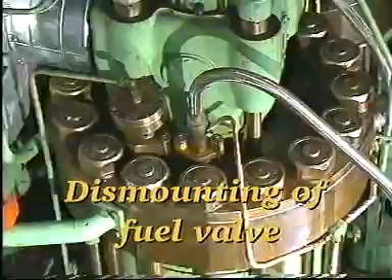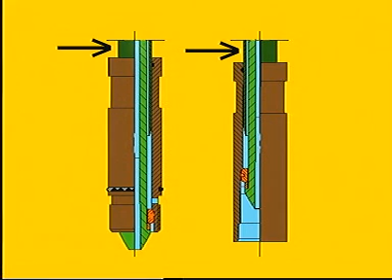Before any dismantling, drain the fuel oil from the fuel oil high pressure pipes. Confirm that the oil flow has stopped before continuing. The fuel oil high pressure pipe may be provided with a protective outer pipe or with flexible steel wire braided hoses. See Instruction Book Volume 2, Chapters 901 and 909.

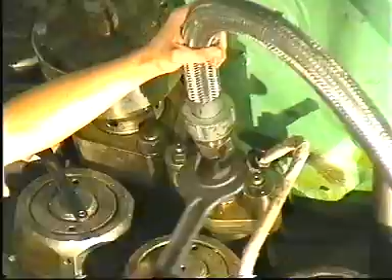Using a hook spanner, loosen the union nut. Using a spanner, loosen the coupling pieces fitted on each end of the high pressure pipe. Remove the high pressure pipe. Take care not to damage the high pressure pipe seatings.

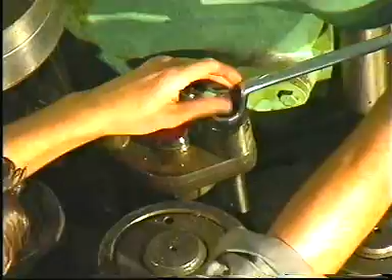Disconnect the return oil pipe from the fuel valve. Mount protective plastic plugs in or on all high pressure seatings. Unscrew the retaining nuts and remove the spring housings. Remove the fuel valve from the cylinder cover using the lifting tool if the valve sticks.

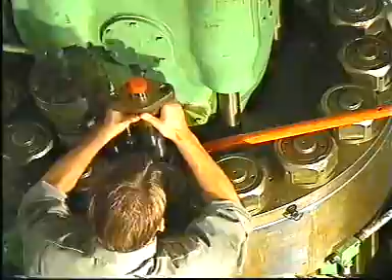Thoroughly clean the fuel valve bore in the cylinder cover. Clean off any carbon deposits in the fuel valve bore with a carbon cutter. If marks are found on the seating in the bore, recondition the seating with a seating face cutter. Finally, grind the seating with a grinding mandrel and a grinding compound, for example carborundum number 200.

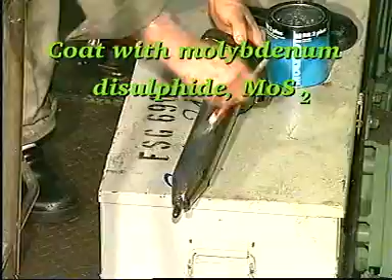After milling and grinding, thoroughly clean the bore and seating and check again that there are no signs of damage on the seating. After reconditioning the seating in the bore and thoroughly cleaning both bore and seating, fit new O-rings on a new or overhauled fuel valve which has just been pressure tested and lubricate with molybdenum disulfide. Carefully mount the valve in the cylinder cover.

To ensure that over-tightening has not taken place, check that the locking and indicating pins have not been bent or broken off. In the event of over-tightening, mount a new spring housing. We recommend that the calibration of new and especially old spring housings be checked before they are mounted on the engine or on the fuel valve test rig.

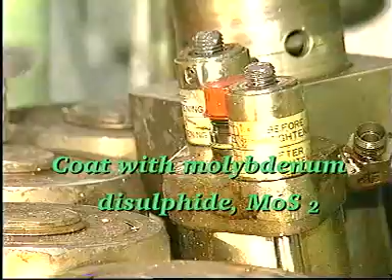Mount the spring housings and retaining nuts. Tighten the nuts until the top face of the pressure disc is flush with the top face of the spring housing. Reconnect the return oil pipe to the fuel valve.

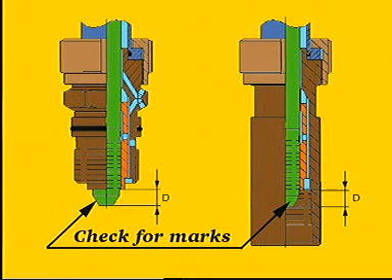Check that there are no marks on the seating surfaces of the fuel oil high pressure pipe. If necessary, recondition the seatings as described in procedure number 909. On fuel oil high pressure pipes which are provided with a steel armoured protective hose, also check distance D, that is between the thrust bushing and the pipe end. See procedure number 909.

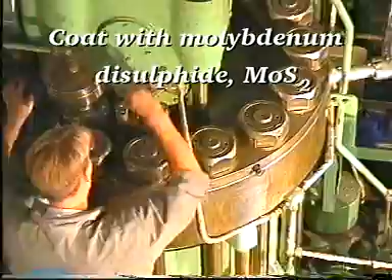Clean the threads and replace the O-rings. Coat the threads with molybdenum disulfide. Mount the fuel oil high pressure pipe.

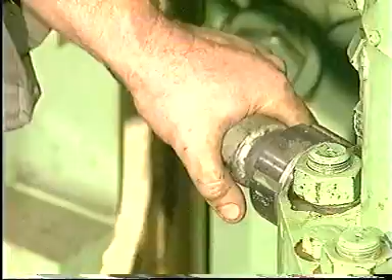Adjust the torque spanner to the value indicated in procedure number 901. Tighten the coupling pieces using the torque spanner. Using the hook spanner, tighten the union nut. Close the fuel oil drain valve. Turn on the fuel oil supply.

Slide-type fuel valves which have been in service on the engine must be disassembled and cleaned before pressure testing, as otherwise the results of the pressure testing will be inaccurate. Pay particular attention to the cleaning of the cut-off slide and the nozzle. When overhauling fuel valves, handle all parts with care and keep them clean.

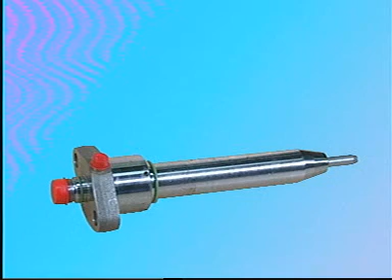Careful handling applies particularly to the spindle guide and cut-off slide, as any rough handling of these components may cause them to malfunction. Do not clean the fuel nozzle with a rotating steel brush, as this may damage the spray holes. If cleaning with diesel oil or the like is insufficient, use emery paper to clean the spray holes.

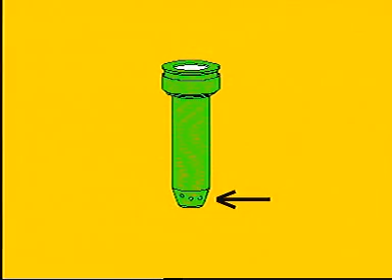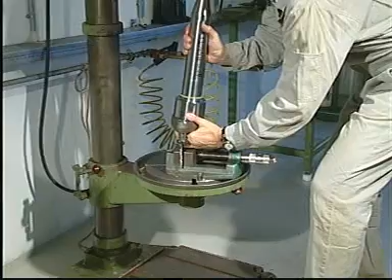Using the special tool, set up the fuel valve on the plane of a drilling machine. Before disassembling the fuel valve, measure distance A, as this measurement is used later during reassembling. Mount the special tool to protect the fuel valve nozzle. Press down the handle of the drilling machine to compress the spring of the thrust spindle. This will relieve the pressure on the threads of the union nut and thereby prevent seizure. Using a hook spanner, loosen the union nut.

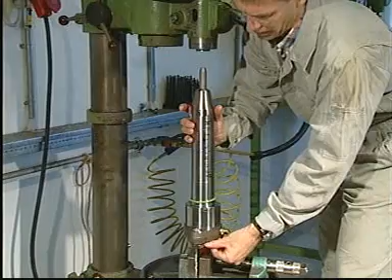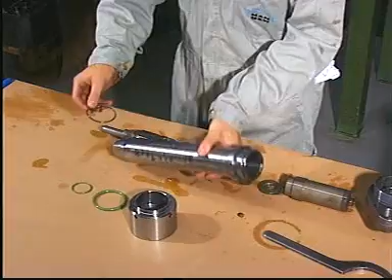Remove the sealing rings from the valve head and valve housing. Remove the non-return valve, thrust spindle and spindle guide. Remove and discard all sealing rings. Clean all parts in gas oil and wipe them dry with clean, non-fluffy rags.

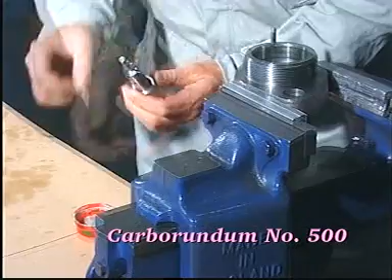Examine all seating surfaces of the valve head, thrust spindle and valve housing. If necessary, grind the seating surfaces with the grinding mandrels and carborundum number 500. Use the milling tool if more serious damage has occurred on the seating surface for the fuel oil high pressure pipe. Loosen the screw and press the spindle and stop ring downwards. Then retighten the screw.

The diameter of the seating surface must not exceed the value stated in procedure 909/6 in volume 2 of the instruction book.

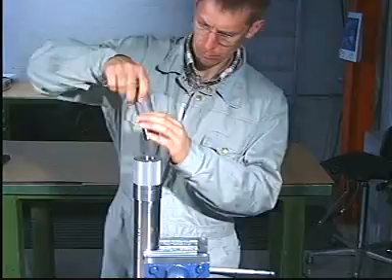After grinding and milling, clean the parts in gas oil and wipe them dry with clean, non-fluffy rags. The non-return valve and spindle guide should be sent to an MAN B&W diesel service centre or authorised repair shop for overhaul. If this is not possible, the parts may be overhauled as described in the next sequence in this film.

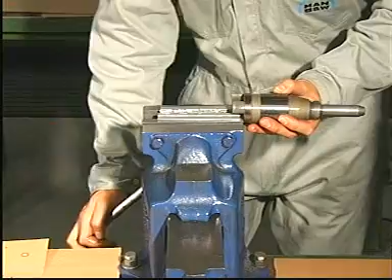Set up the spindle guide in a bench vise provided with soft jaws and disassemble the spindle guide with a brass mandrel and a hammer. Do not attempt to remove the fuel nozzle before the spindle guide has been disassembled, as such action may damage the cut-off slide.

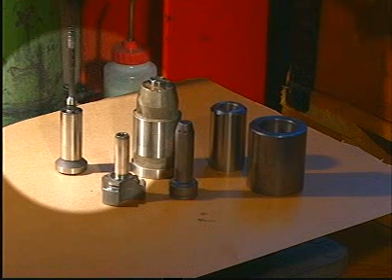The thrust piece, spindle and spindle guide are matched parts and therefore must not be replaced individually. To keep the matched parts together, disassemble only one spindle guide at a time. Dismount the fuel nozzle using the pulling tool.

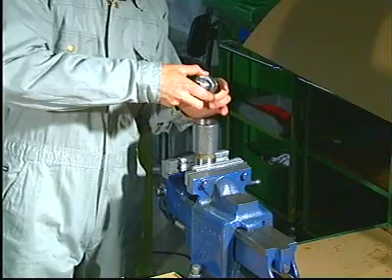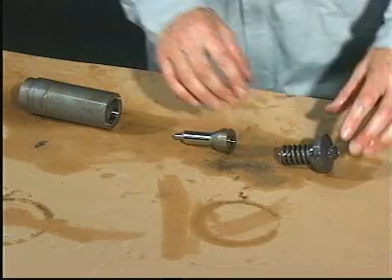Disassemble the non-return valve using the special tool. The thrust piece, vent slide and housing are matched parts and therefore must not be replaced individually. To keep the matched parts together, disassemble only one non-return valve at a time. Carefully clean all parts and wipe them dry with clean, non-fluffy rags.

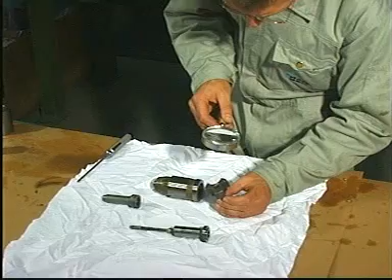Examine all seats and sliding surfaces through a magnifying glass with an 8 to 10 times magnification. Use an inspection lamp when inspecting the internal surfaces. Set up the parts in a lathe and remove any deposits or very fine scratches with a polishing linen grade 360 and oil. Under no circumstances use a coarser polishing linen.

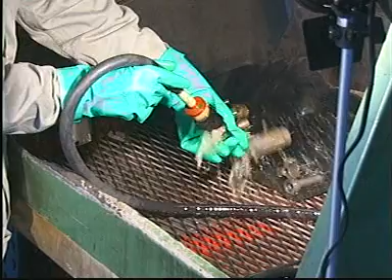Under no circumstances must the sliding surface of the cut-off slide be polished. After polishing, clean and inspect the surfaces once again. If there are pressing in marks or other anomalies, the spindle guide or non-return valve must be discarded. Pay special attention to the condition of the edge of the cut-off slide.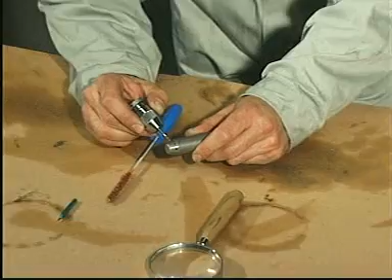Clean the central bore with a brass brush to remove any carbon deposits. Clean the spray holes with the special drills. Be very careful not to push the drill too far into the spray holes, as this would damage the internal surface of the fuel nozzle.

Carefully clean the nozzle and wipe it dry with clean, non-fluffy rags. Test the spray holes with a test pin. If the test pin can be inserted into just one of the holes, or if the holes have become oval in shape, discard the fuel nozzle. We recommend that the fuel nozzle be discarded at each spindle guide overhaul. However, if the spray holes are in order, the fuel nozzle may be reinstalled.

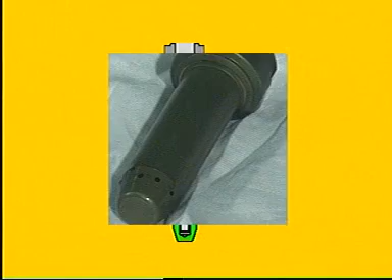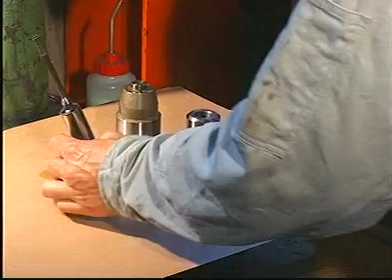Before reassembling the spindle guide, check that the cut-off slide moves freely inside the nozzle. Lubricate the spindle guide parts with molybdenum disulfide or oil. Loosely assemble the thrust piece, spindle and spindle guide and carefully tap the parts together with a soft hammer. Check that the slide is able to move freely inside the spindle guide. Lubricate and mount the fuel nozzle.

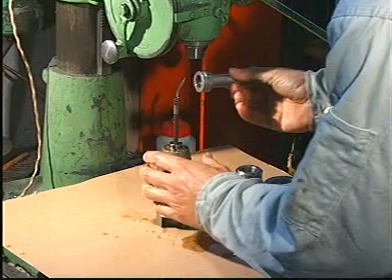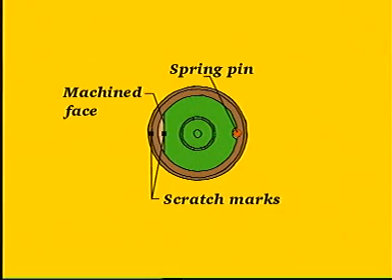Ensure that the scratch marks on the spindle guide and on the nozzle flange match up, and that the spring pin engages correctly in the groove in the flange of the nozzle. Be very careful when fitting nozzles of an older design with a machined face on the flange, as such nozzles may inadvertently be turned 180 degrees, which would seriously affect the cylinder condition and combustion process.

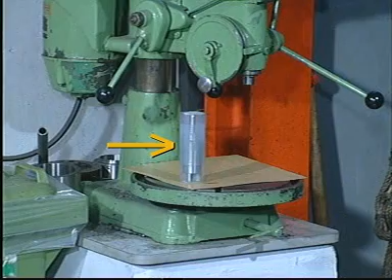Place the parts on the plane of a drilling machine and mount the special tool. Then press the parts firmly together. Check once again that the cut-off slide is able to move freely. Protect and handle the spindle guide very carefully, as any rough handling may cause the component to malfunction.

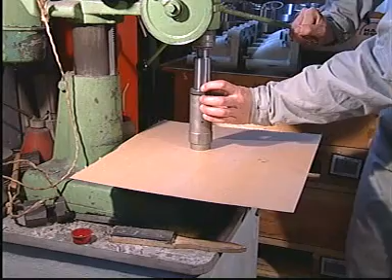Rub a paste-like mixture of molybdenum disulfide and mineral oil onto the sliding surfaces of the non-return valve. Remove any excessive paste and loosely assemble the parts. Place the parts on the plane of a drilling machine and mount the special tool. After ensuring that the parts are perfectly aligned, press them firmly together. If the non-return valve is not to be used immediately, cover all openings with plastic covers to prevent dirt entering them during the storage period.

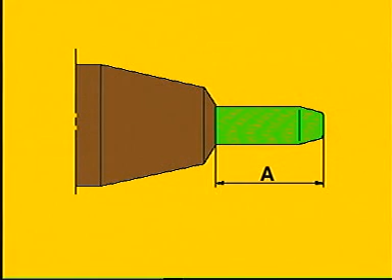Slide the spindle guide carefully down into the valve housing. Make sure that the spindle guide engages correctly with the guide pin. Check that distance A corresponds to the measurement taken before the fuel valve was disassembled. Mount the thrust foot, thrust spindle parts and non-return valve. Discs added at a later time to adjust the opening pressure must be placed above the original disc.

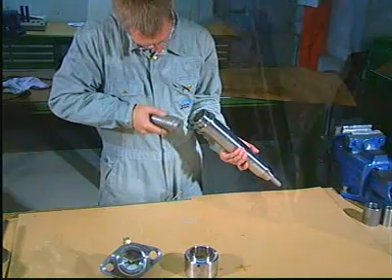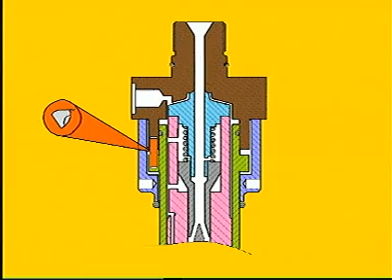Mount a new sealing ring on the valve housing. Make sure that the guide pin is intact, then mount the valve head. Lubricate the threads of the valve head with molybdenum disulfide. Make sure that the guide pin engages correctly with the groove in the valve housing and mount the union nut.

Mount new sealing rings on the valve housing and valve head and mount protective plastic plugs. Press down the handle of the drilling machine to compress the spring of the thrust spindle. This will relieve the pressure on the threads of the union nut and thereby prevent seizure. Using a hook spanner, tighten the union nut.

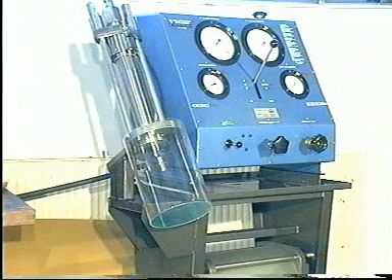Overhauled fuel valves or fuel valves taken from stock must be function tested before they are mounted in the cylinder cover. Slide type fuel valves which have been in service on the engine must be disassembled and cleaned before pressure testing, as otherwise the results of the pressure testing will be inaccurate. Pay particular attention to the cleaning of the cut-off slide and the nozzle.

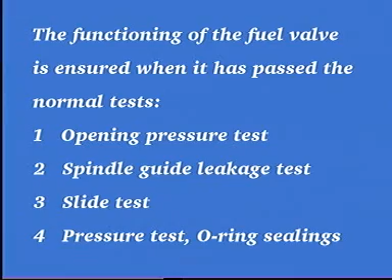The pressure testing pump is equipped with pressure gauges for displaying opening pressure, working pressure, venting function and air inlet pressure. Position the fuel valve in the test rig. For guidance on how to operate the pressure testing pump, refer to the supplier's special instructions.

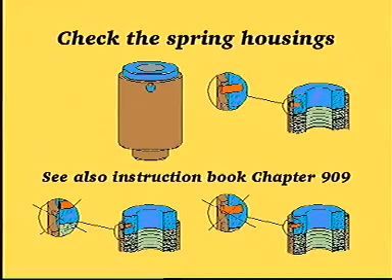To ensure that over-tightening has not taken place, check that the locking and indicating pins have not been bent or broken off. In the event of over-tightening, mount a new spring housing. A very important element in the correct functioning of the fuel valve, both during testing and in service, is ensuring that the spring housings apply the predetermined tightening force. To ensure that this force is present, a special tool has been designed to check the calibration of the spring housings. We recommend that the calibration of new and especially old spring housings be checked before they are mounted on the engine or on the fuel valve test rig.

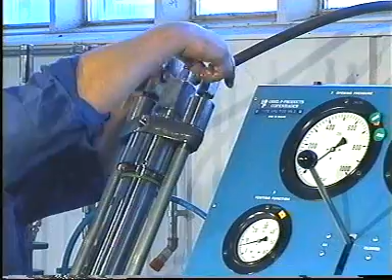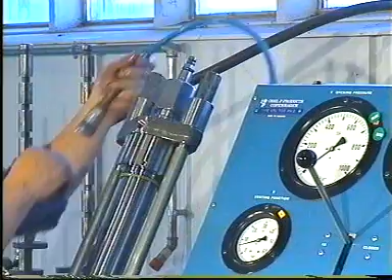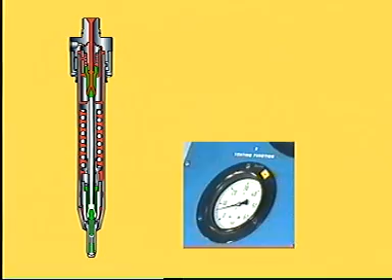Tighten the nuts until the top face of the pressure disc is flush with the top face of the spring housing. Connect the pressure testing pump and the return oil pipe to the fuel valve. Slowly fill the valve by pumping at low pressure until oil, without air bubbles, flows from the return oil pipe. Slowly increase the pressure until oil is emitted from the nozzle holes.

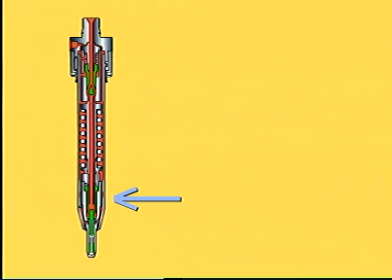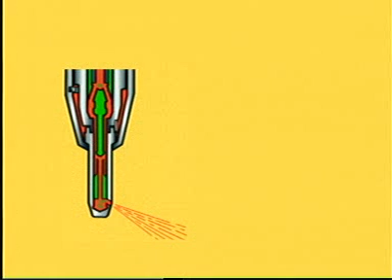First, the slide on the non-return valve will close the circulating bore, whereafter oil will flow to the spindle guide. Once the opening pressure has been reached, the spindle will lift. The oil flows to the nozzle and is emitted through the nozzle holes. Due to the geometry of the internal part of the nozzle, and because the height the spindle is lifted during pressure testing is lower compared to the lifting height during normal engine operation, the fuel oil will not necessarily flow from all of the nozzle holes.

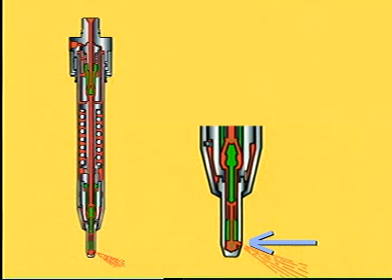Flush the valve for about 5 seconds, then stop the pump. First, the spindle closes. The oil will stop flowing the moment the cut-off slide has covered the nozzle holes. This well-defined closing of the fuel valve will minimize the fouling of the components in the combustion space. Hereafter, the slide on the non-return valve moves downwards and uncovers the circulating bore. Filling up the fuel valve. Continuous operation.

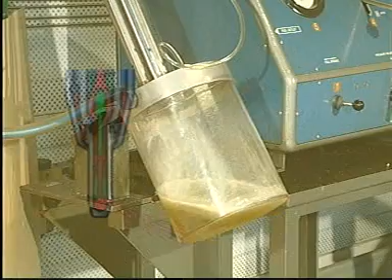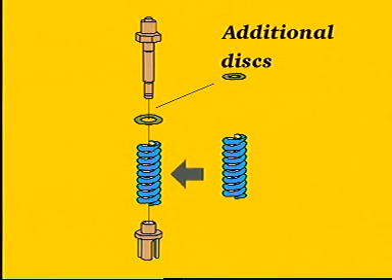Slowly increase the pressure until oil is emitted from the nozzle holes. Due to the geometry of the internal part of the nozzle, and because the height the spindle is lifted during pressure testing is lower compared to the lifting height during normal engine operation, the fuel oil will not necessarily flow from all of the nozzle holes. Read the actual opening pressure on the pressure gauge marked opening pressure. Compare the actual opening pressure with the pressure specified in procedure number 909 and, if necessary, insert or remove discs or replace the spring. Do not insert more than 5 extra discs when adjusting the pressure. The fuel valve must be retested after any adjustment.

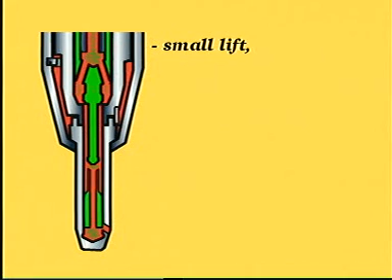Warning: do not attempt to carry out an atomization test on slide-type fuel valves, as this may damage the cut-off slide and nozzle. The height the spindle lifts during pressure testing is very small compared to the lifting height when the engine is in operation. This low spindle lift height leads to an abnormally high pressure drop across the slide and, consequently, an abnormally high contact pressure between the slide and the nozzle. Furthermore, the slide oscillates at a very high frequency. These conditions, in combination with a relatively thin pressure testing oil, may lead to a seizure between the slide and the nozzle.

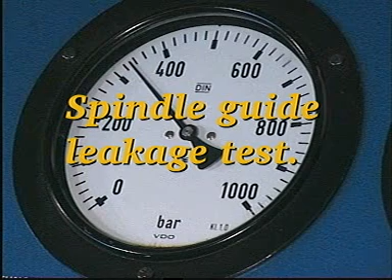Increase the pressure until it is about 50 bar below the actual opening pressure. There will always be a certain amount of oil flowing from the return oil pipe when the fuel valve is full of oil and pressurized. Oil must not seep from the fuel valve nozzle holes until a pressure of 50 bar below the actual opening pressure is reached. If oil does seep from the fuel valve nozzles, see procedure number 909. Lapping of the internal seatings is not acceptable.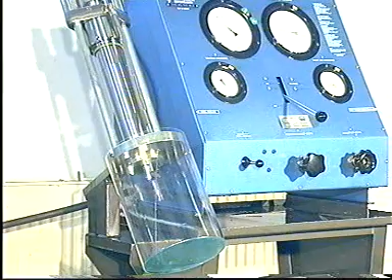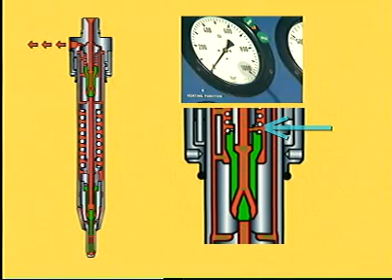Increase the pressure to about 50 bar below the opening pressure and then move the control handle to the closed position. The pressure will gradually drop to around 15 bar, whereafter the slide on the non-return valve will open and the pressure will drop very quickly to 0. If the quick pressure drop cannot be registered, the slide is sticking or the hole is blocked. Disassemble and examine the parts, replace if necessary.

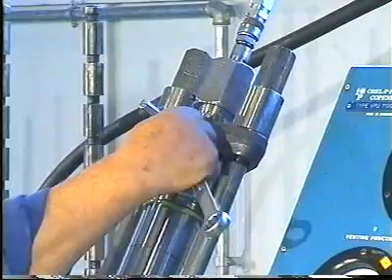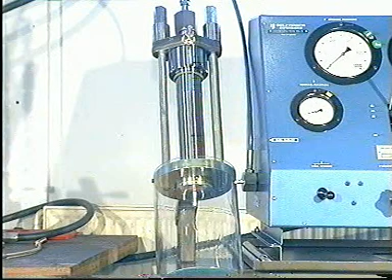Slowly fill the valve by pumping at low pressure until oil, without air bubbles, flows from the return oil pipe. Remove the return oil pipe and block the outlet hole with a gasket and a plug screw. Increase the pressure to about 100 bar and move the control handle to the closed position. The pressure should now remain at 100 bar. If oil leaks from the union nut, replace the internal O-ring seal between the valve housing and the valve head. If oil leaks around the fuel valve nozzle, check the condition of the contact faces between the nozzle and the valve housing. After the fuel valve has passed all the tests, it can be mounted in the cylinder cover.